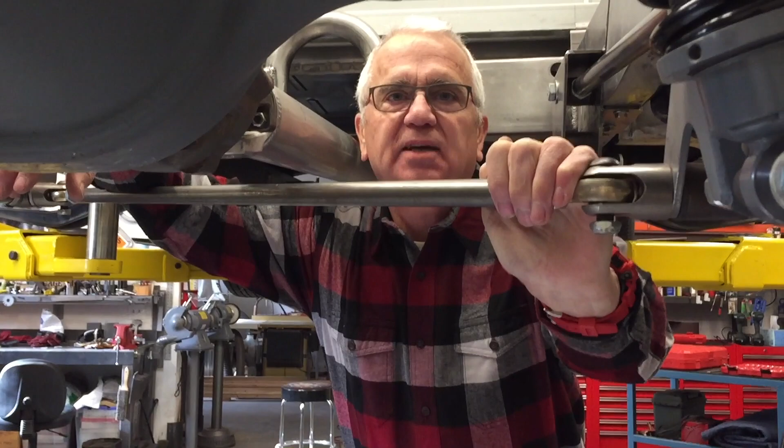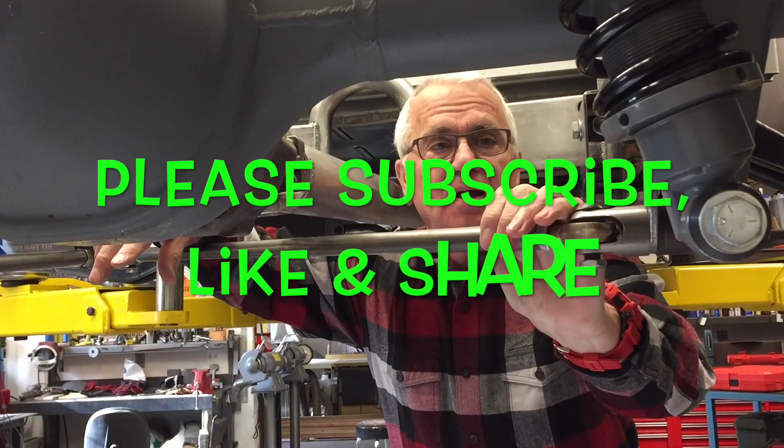Today I just wanted to do an update on what I'm doing on my 53 truck, kind of show you where I'm at and what I've been thinking about. And so today I'm going to talk to you a little bit about Panhard bars, what they are, and why I'm going to switch to it.

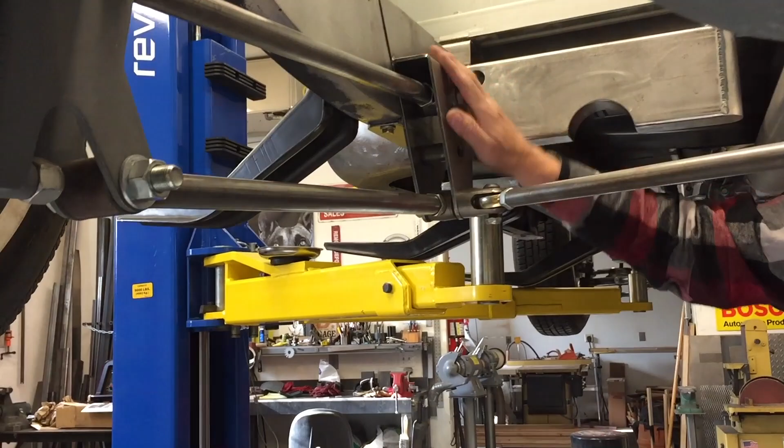So when I bought this suspension system for this truck, it came with this bar here, which is called a diagonal link. And it hooks to the frame here through this bracket, and then it goes at a diagonal all the way over to the axle housing. The purpose of this diagonal link is to keep the axle centered in the wheel wells, centered in the frame, okay? And it works for that.

It keeps it centered. But what I found out in doing some research is that this is really for drag racing only. It's not really designed for street use. It puts a lot of strain on these joints in hard cornering. And I'm not making a straight ahead drag racer. I'm making something for driving down a road, doing smoky burnouts, fast cornering, stuff like that. Have fun. So I decided to go with a Panhard bar.

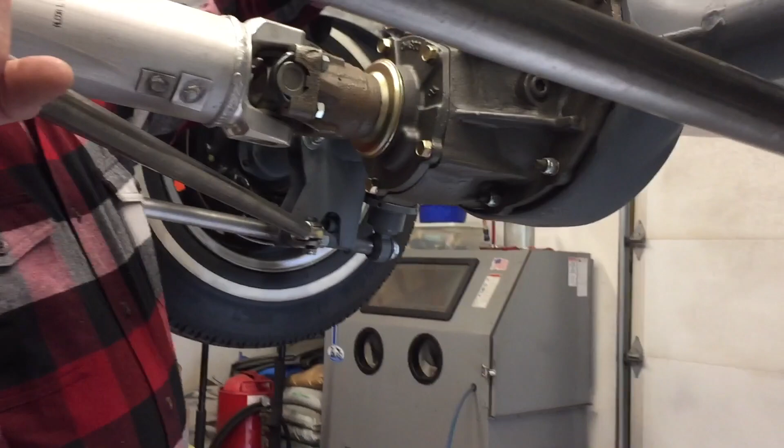And I'm leaving this in place right now so that I can fit the Panhard bar and make sure that it's centered in the frame, okay? So if you come around to this side so they can see what's going on. So I've already got one bracket mounted to the axle housing for the differential. And the Panhard bar is an adjustable bar that goes from the differential housing over to some tabs on the frame. Okay, and I'll show you over at the bench.

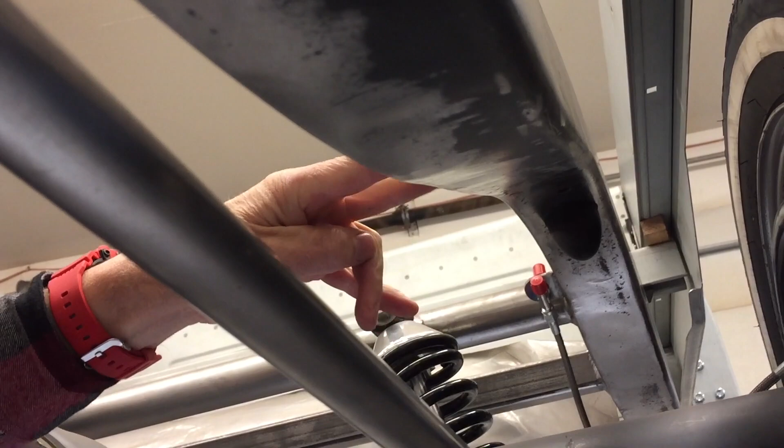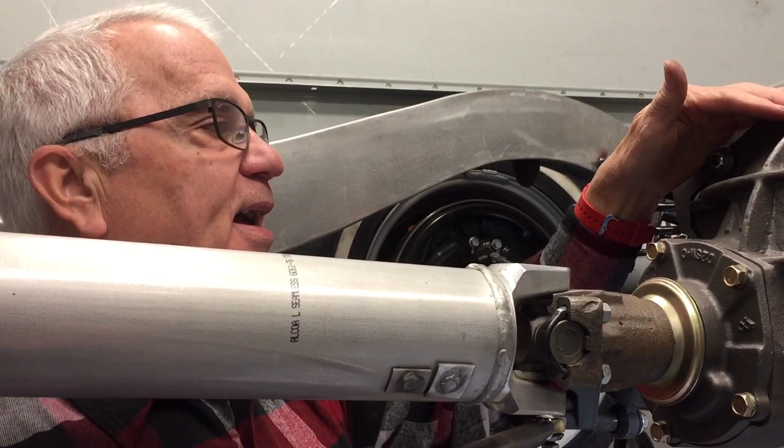And so it's adjustable so that you can center the axle housing in the frame rails. And it's much better suited for street driving, for cornering, things like that. And for what I'm doing, I think this is kind of a weak link. So I'm going to show you over at the bench what I'm talking about. And it's pretty cool. Let's go over to the bench.

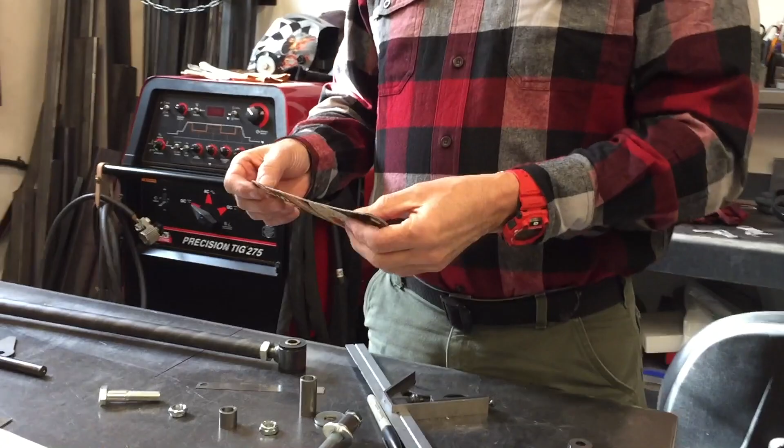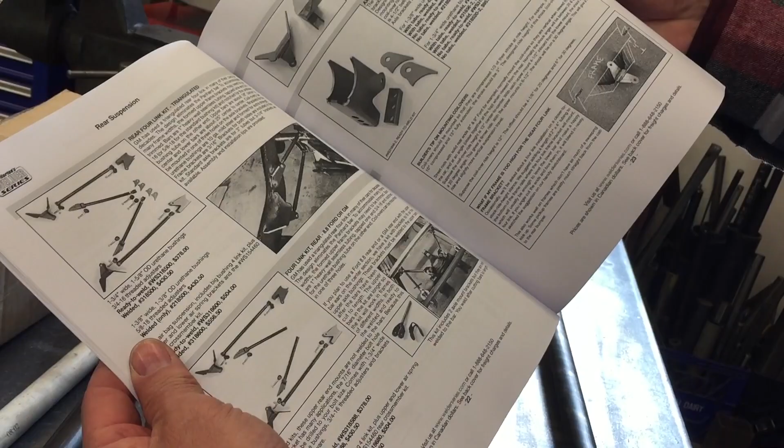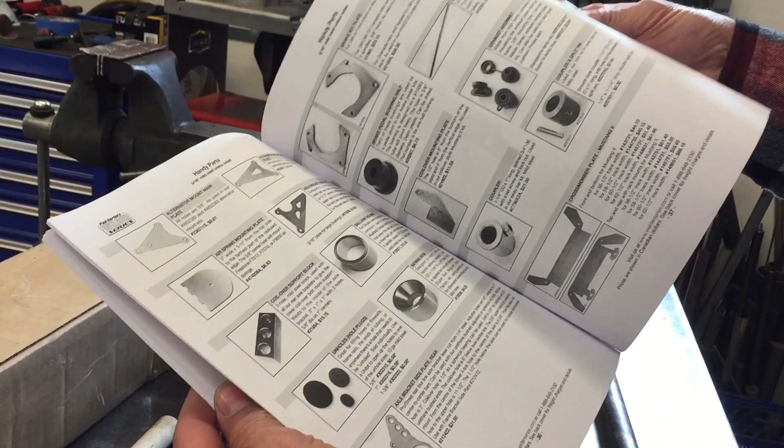Okay, so first of all, let me just tell you that I went with this company here. It's called Paul Horton's Welder Series. He's in Canada and has a nice catalog with all kinds of fabricated stuff that works. You got 4-link rear suspension, triangulated links, all kinds of stuff, sway bar kits, brackets, axle housing brackets. Really a good source of parts that can get you going on your project.

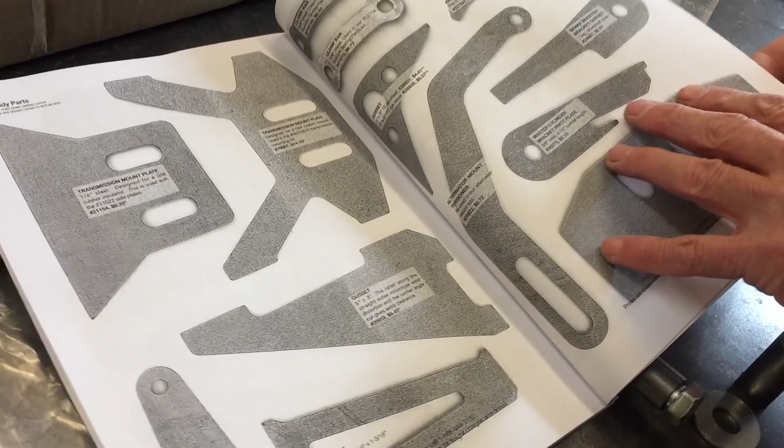But what's really kind of cool is on the back of his catalog, he has one-to-one pictures of all of his brackets, everything that he makes. And so what I did was, this is the Panhard bar bracket. So I just photocopied this and then cut it out and put it on a piece of cardboard. It's actually one of my oatmeal boxes.

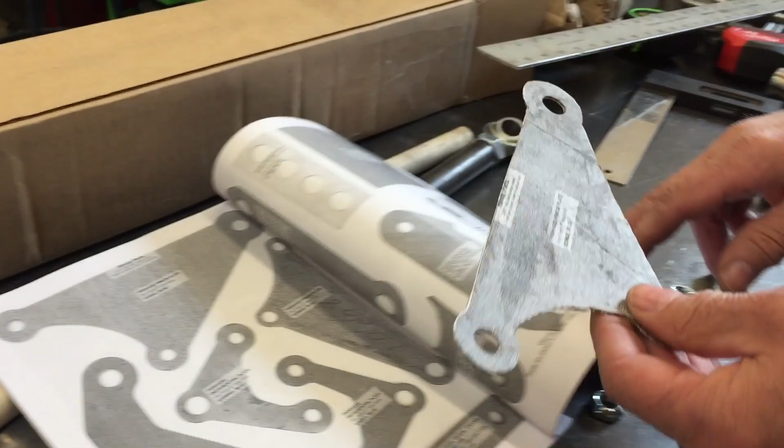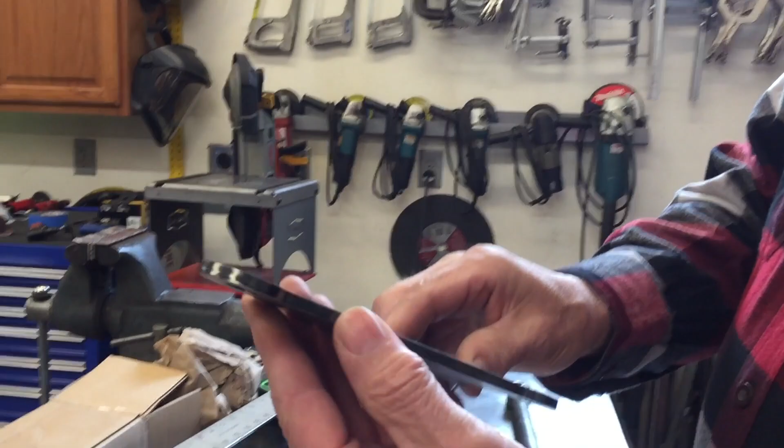And I used this to figure out if I was going to like how the thing's set up. And I kind of held it up there and played around with a piece of wood doweling just to see if I liked the way it was going to fit. And I really did. And on this design, it uses 2 mounting points. I showed you the one on the axle, and this other one comes with the kit too. And look at how nice, beautiful laser cuts. The holes are perfect. It's just a nicely fabricated piece.

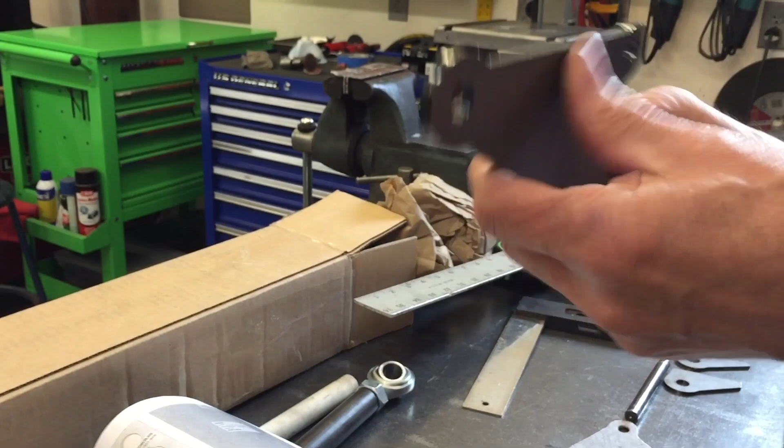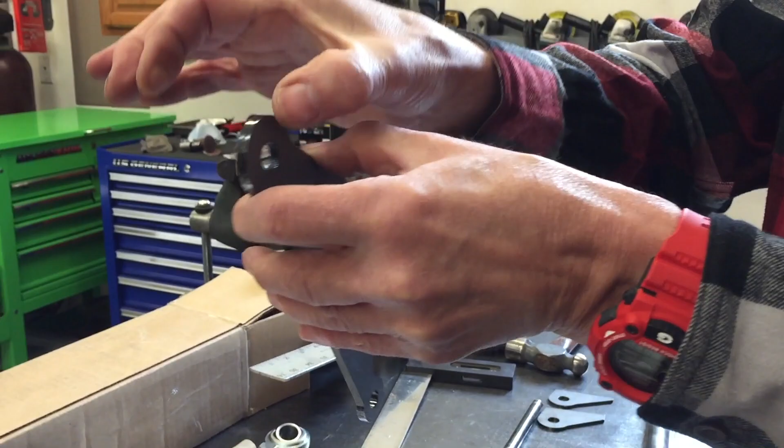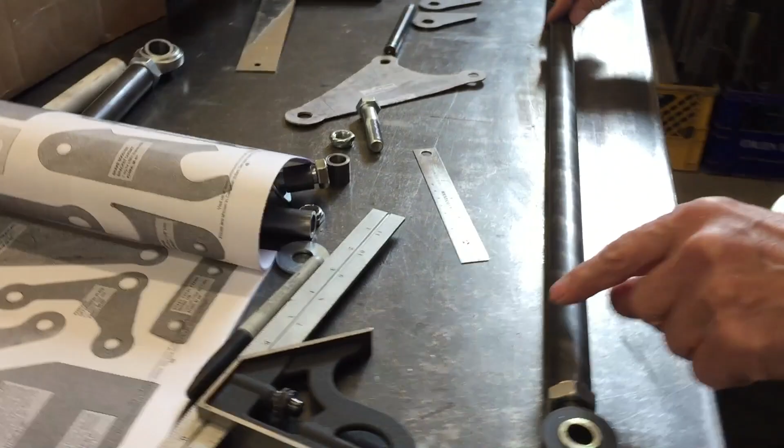Okay, this mounts to the pinion carrier plate on the differential. And so I have 2 points of contact for the Panhard bar. So here's the Panhard bar. This is what you get in the kit. It's 7/8 of an inch DOM tubing. This end is threaded, has a threaded insert, okay, and then a lock jam nut.

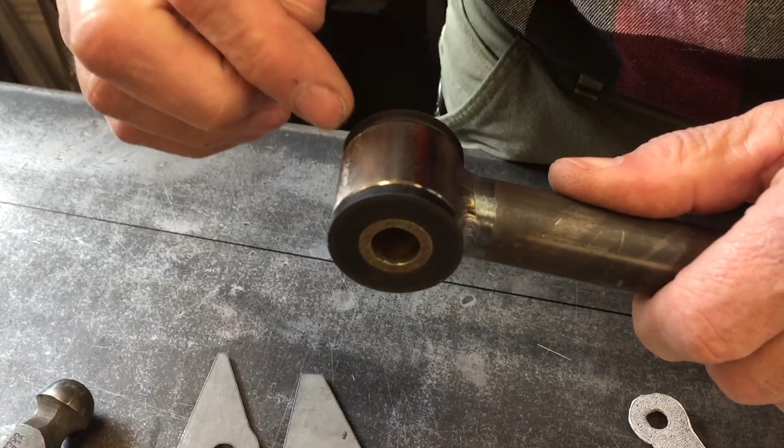And then the other end is nicely TIG welded onto the shaft. And there's a steel bushing in here, and these are polyurethane outside bushings, so they kind of cushion from road shock and stuff. So this end mounts to the differential. This end mounts to the frame. He gives you these tabs in the kit, and you'll notice that one of the tabs is longer than the other one. And the reason that it is that way is because most of the frames taper, right?

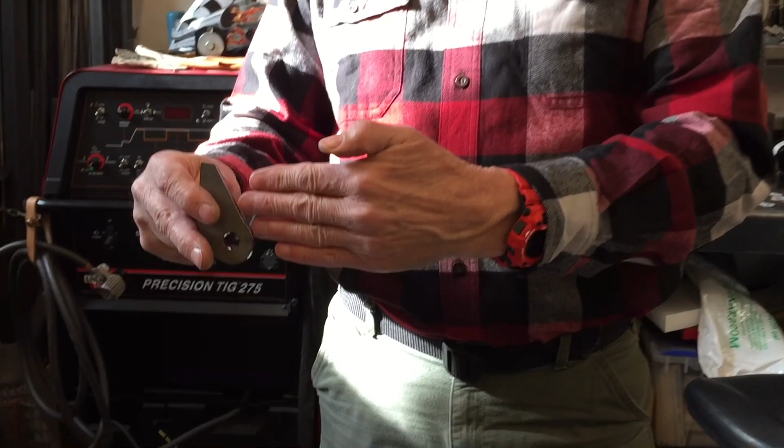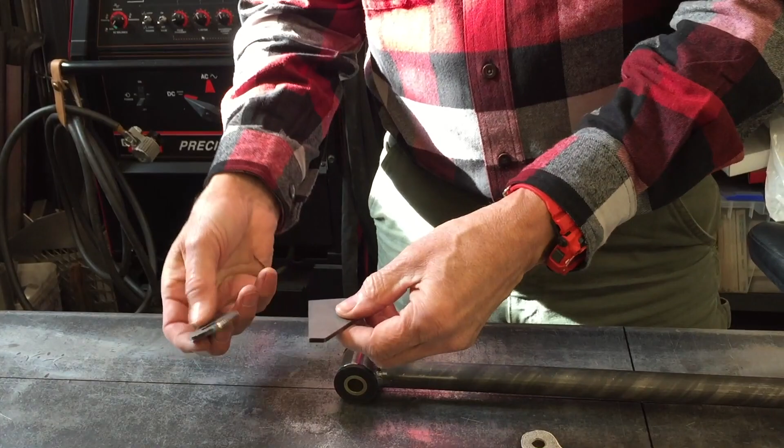And if you just stuck them on the same way, it would put this in a bind. It would be at an angle because the frame is tilting, so it wouldn't be flush with that. I hope I'm explaining that right. So you get angled, you get one shorter than the other. So the long one goes at the, let's see. Yeah, the long one goes this way, and the short one goes at the back.

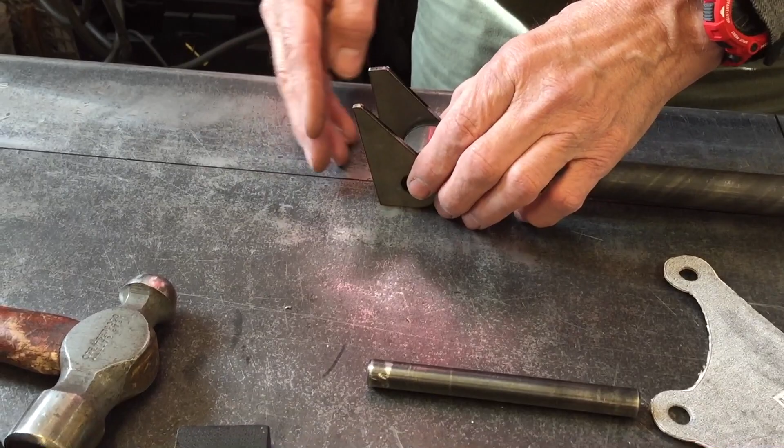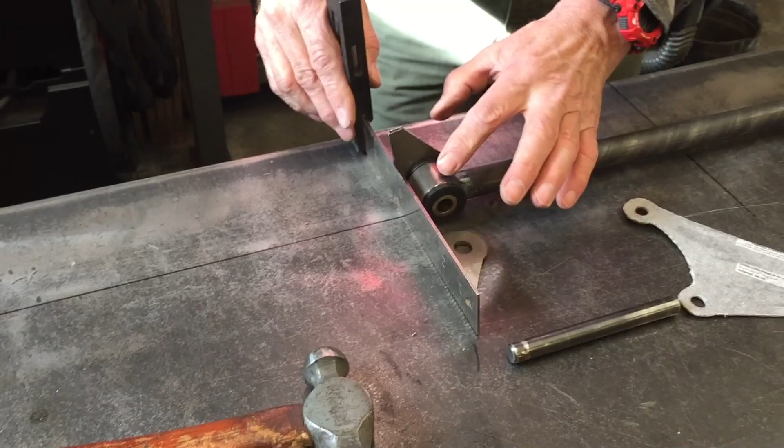And so what that does is, because the frame tilts, like if this was the frame, it allows this to be plumb with the differential. So that's pretty cool that he's already taken that into account. And of course you can file these or grind these to custom fit for your frame, how much angle you have and stuff. So that's pretty cool that he does.

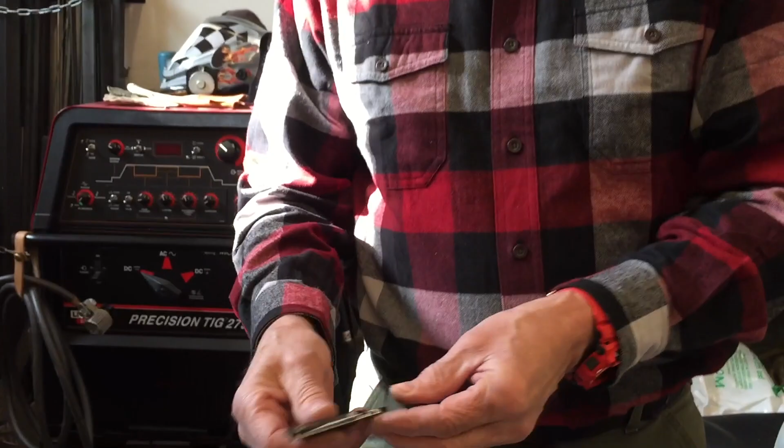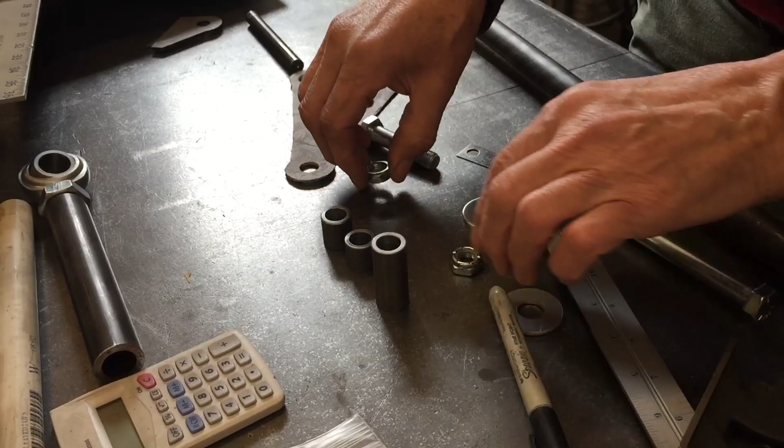So in the kit, you get these two tabs. You get the Panhard bar with the bushings, everything you need. You get the bolt for this end. You get these different sleeves because different applications call for different sleeves. You get two washers, two nylock nuts, and then the bolt for the tab end. So it's a pretty complete set. It comes with everything you need.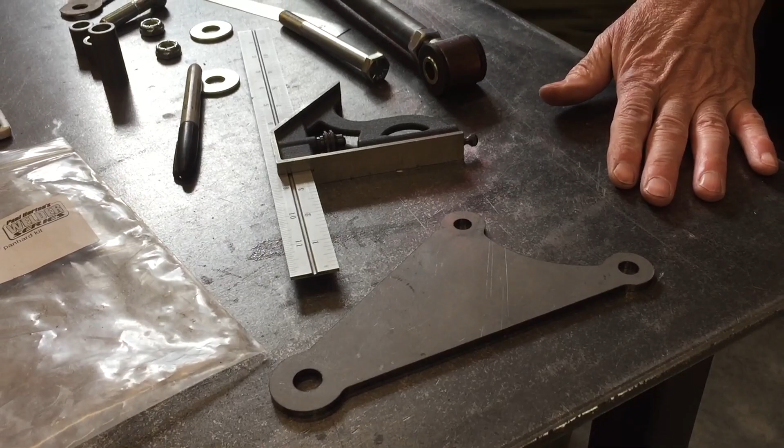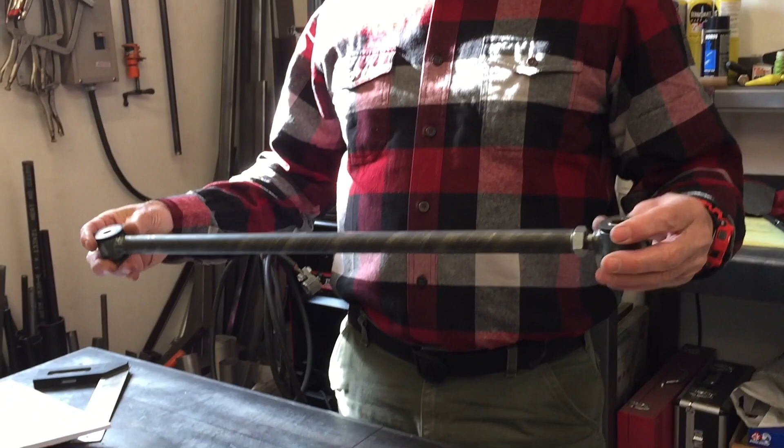And what's really cool is I called him up and I told him what I was working on. I gave him the measurements that I had, how wide my frame was, okay? And then another measurement that they want is from the center of the top of the pinion to the frame. So I gave him all those measurements, and he has a calculator. He's been making these for a long time, and so he was able to come up with the exact length that I needed for my Panhard bar. So that's pretty cool that you can get it essentially custom done.

I think shipped to me was $112. So it's a good value. As you can see from these parts, the quality is top notch. So let's go underneath the frame and, before I get started, let me show you something.

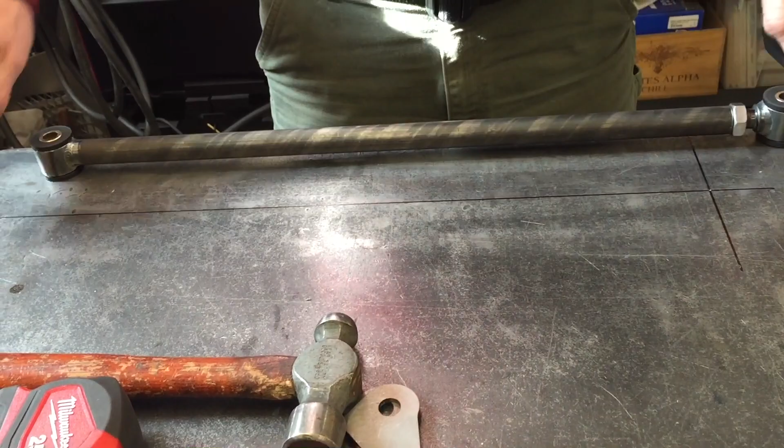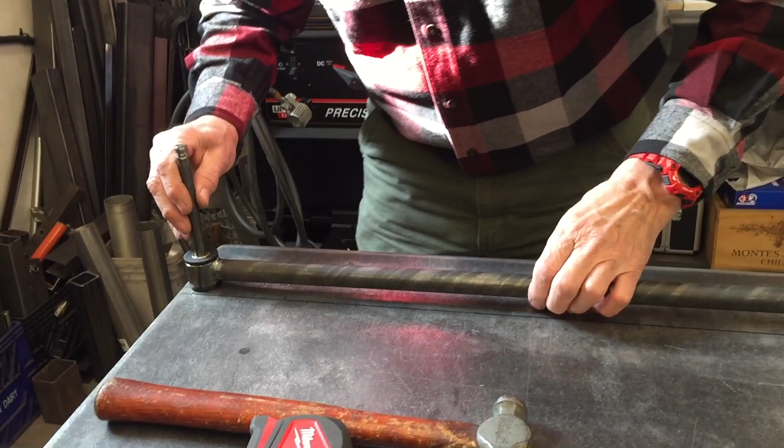Okay, so I set up a little test here to explain something. So let's pretend like, so I drew a line on the bench and I center punched it so that I would be in the center of these two holes. Okay, and then let's see, so I got this little alignment punch. So I'll go in here and I'll find that little mark. Okay. And that one. So that's centered, right?

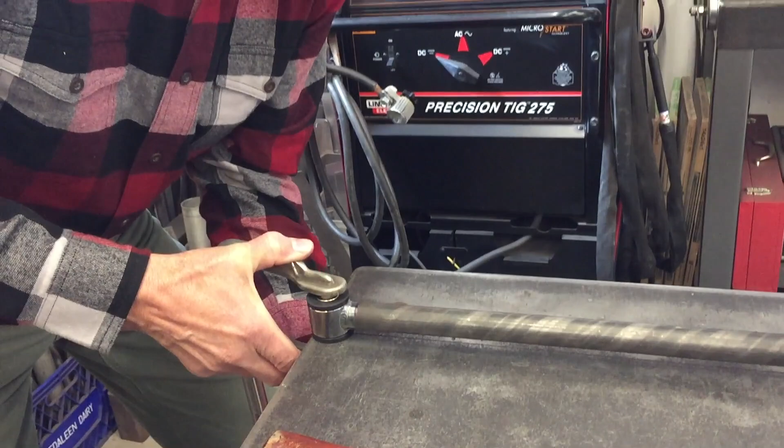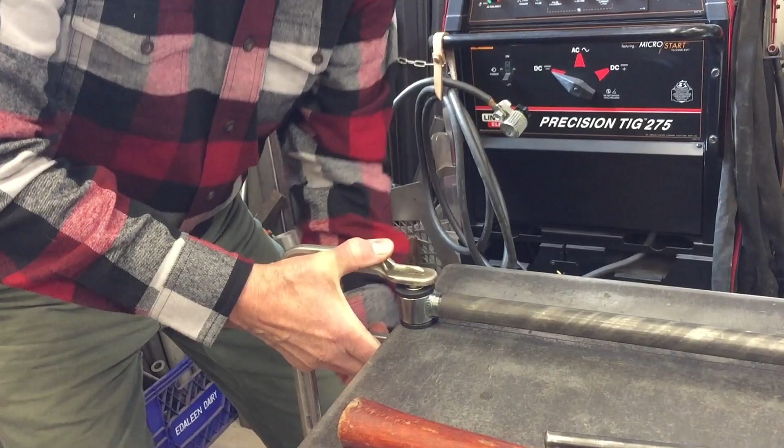So now what I'm going to do, I'm going to drop a little spacer in there. And then I'm going to clamp that to the table. So this would be like it would be in your vehicle. So this is going to become the hinge point of the, darn it. There we go. Okay, so now it can hinge. Okay, so think of this as being attached to the frame and this being on your axle housing. Okay, let's find the center. Right there.

So as you move your suspension up and down, because this is a fixed length, your axle housing is going to move from side to side. Okay, it's going to. So when you install this Panhard bar, you want to make sure that it is at the same level as the axle housing itself. They're on the same plane at ride height. So kind of at a neutral position. So as the axle moves, you know, when you hit a bump and the axle comes up, and then when the axle comes back down, at ride height, it's always in the neutral position, okay?

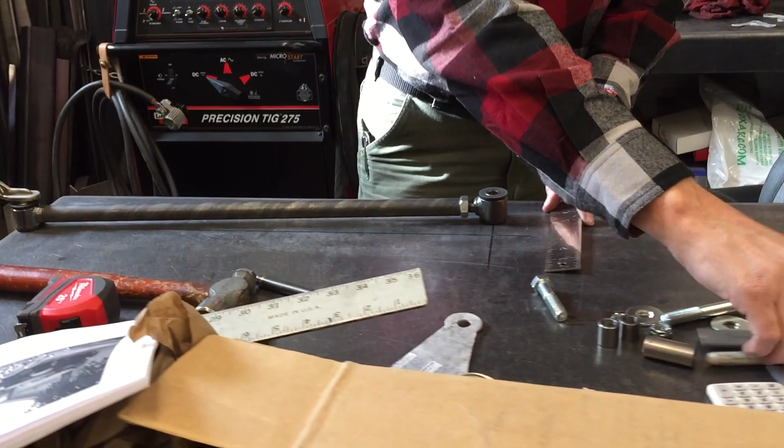So as you move your suspension, and let's say I have about 3 inches of travel on my suspension. So 3 inches of travel there, 3 inches of travel there. And what I'm going to show you is how much it moves. So let's say I hit a bump and it moves up 3 inches.

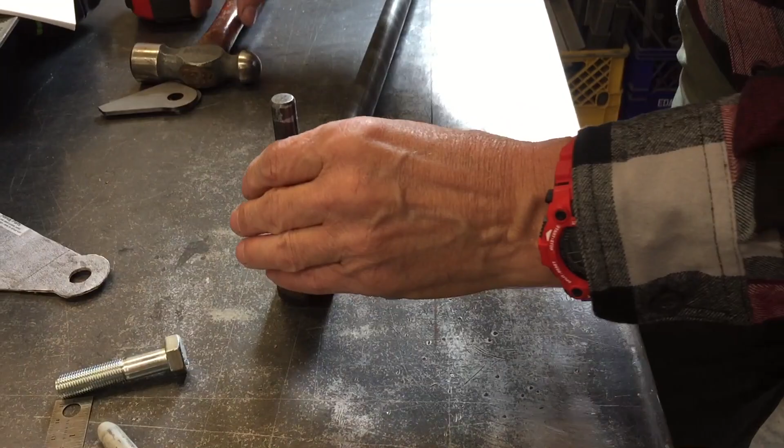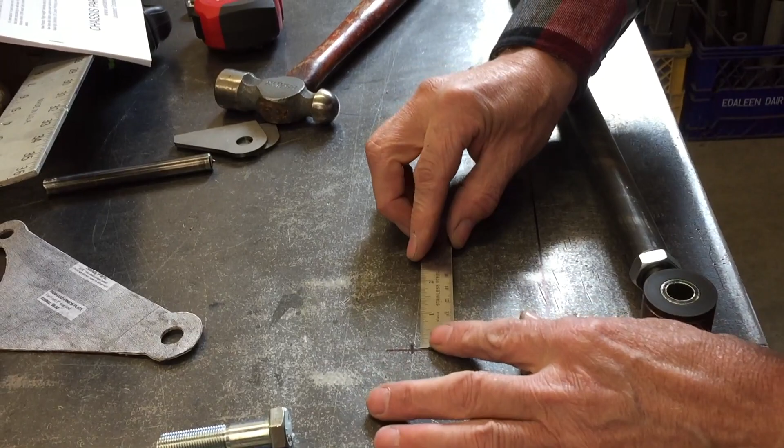That would be a pretty good sized bump. So take my ruler, put it on here, and it moves about, gosh, it's so small, 1/8 of an inch, okay? So that means that at full suspension, both ways, it's going to take the tires and move them 1/8 of an inch, one side or the other. Let's see, if you hit a bump, it's going to pull the tire. It's going to move it on the driver's side 1/8 of an inch out, and on the passenger side 1/8 of an inch in, if that makes sense.

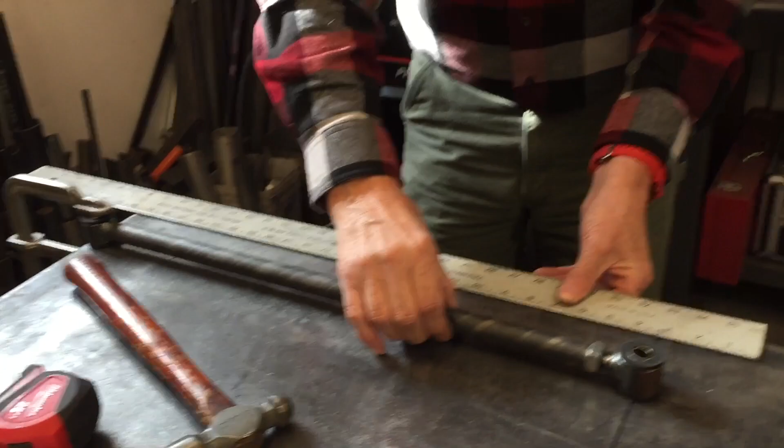But I wanted to show you this because this is the reason why you want this Panhard bar to be at the same plane as the axle housing. So if this was the axle housing, you'd want it at the same plane, level with the axle. So neutral. That way the movement is identical, compressed or extended, depending on what your suspension's doing. If you mounted it in the vehicle and it was like this, then when you hit a bump and moved your 3 inches, it would be uneven.

It's hard to explain. You know, I'm not an engineer, guys. I just wanted to know this for my own, like, how much is it going to move? And I looked on the internet and I couldn't really find anything, so I just came up with this little example for me, and I thought I'd share it with you. So the bottom line is, according to people that are really smart, keep this level with the axle housing, and as you can see from my little non-scientific method, it's about 1/8 of an inch of movement, so that's not much at all.

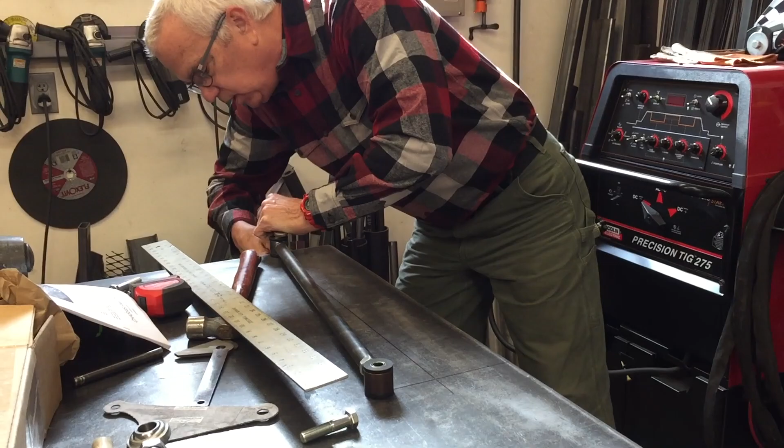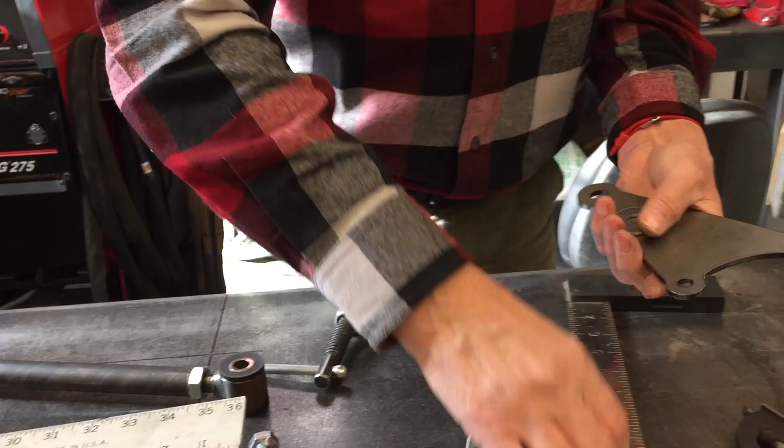And so hey, let's go into the truck. Let me show you how this fits on there. So it's pretty cool. Okay, come on there, get that off. I'm gonna put these on so you guys can see how that works. That to there. These are good. This part gets welded to the frame, obviously. And okay, so I need this. All the assorted hardware, spacers, and the Panhard bar. So let's go underneath. I'll show you how it's supposed to work.

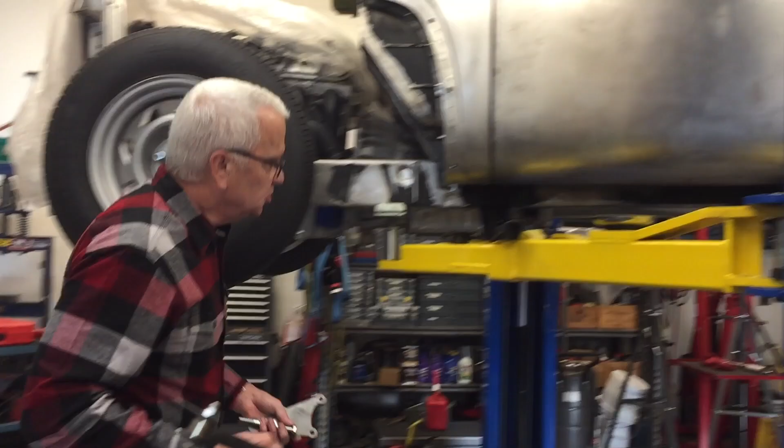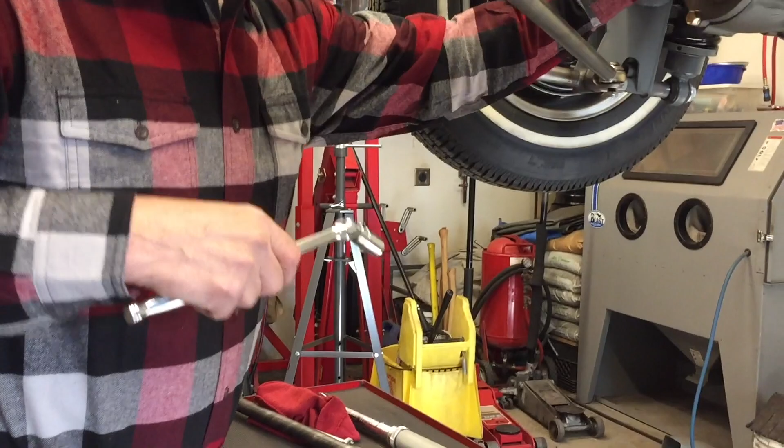So the first thing you gotta do, I've already got this one mounted on there, and these axle housings use nylock nuts to hold them on, and there's not a whole lot of thread left. So what I did was, this is 3/16 plate steel, and so if I reused the nylock nuts, there wouldn't be any nylon to lock it onto the stud. So I use steel lock nuts. They're a lot thinner, and it locks it onto the thread. So just a little tip for you guys.

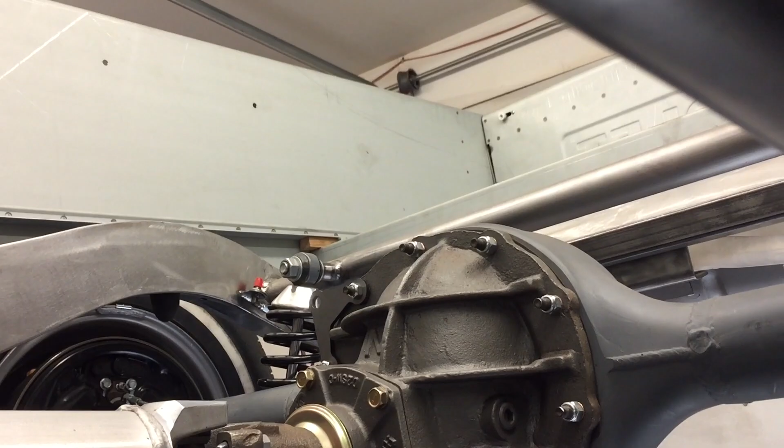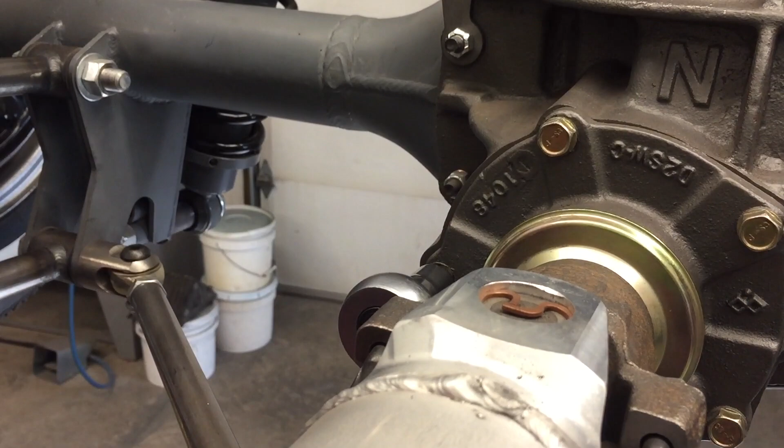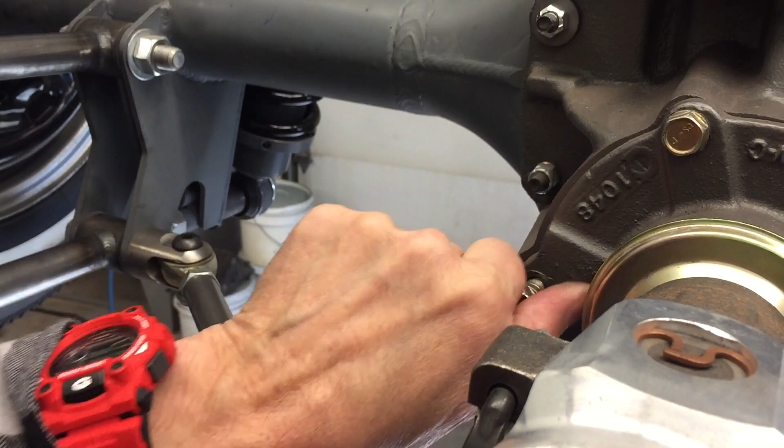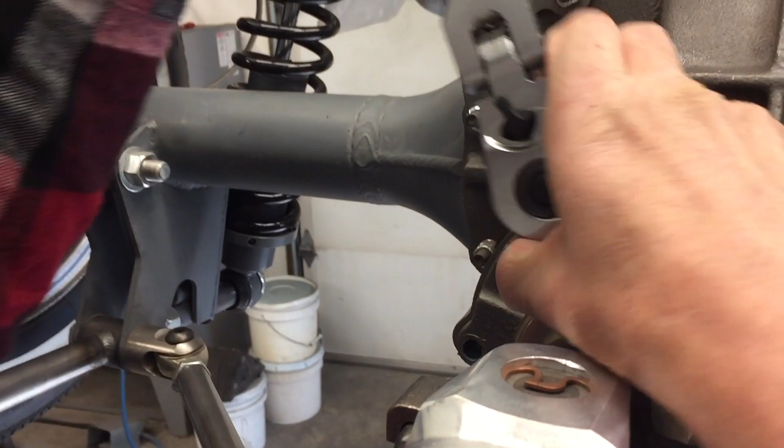So now we gotta loosen these guys. Boy, it's tight. I don't know why they put that on so tight. I'm sure they got thread locker on there. We will soon find out if there's thread locker on there. Yep. Blue Loctite. Well, it wasn't red. That's good. Yep. Blue Loctite. So I'm going to put this on. I think I'll probably Blue Loctite it again. That's probably not a bad idea, I guess. But what I want to do is show you guys how this works.

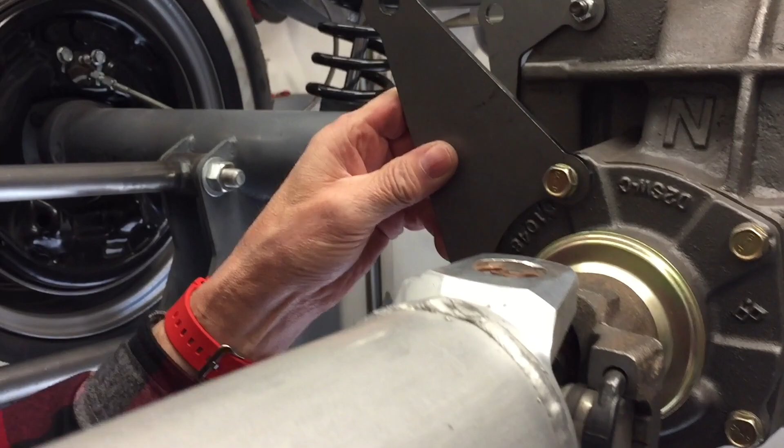And let me get a ratchet. Boy, they really put the blue Loctite on that thing. Okay, I don't need to put the other one in to show you how this works. Okay, so we get the Panhard bar up in here. And I know according to the, let's see, which one? So I think it's the longer one. Maybe two of those.

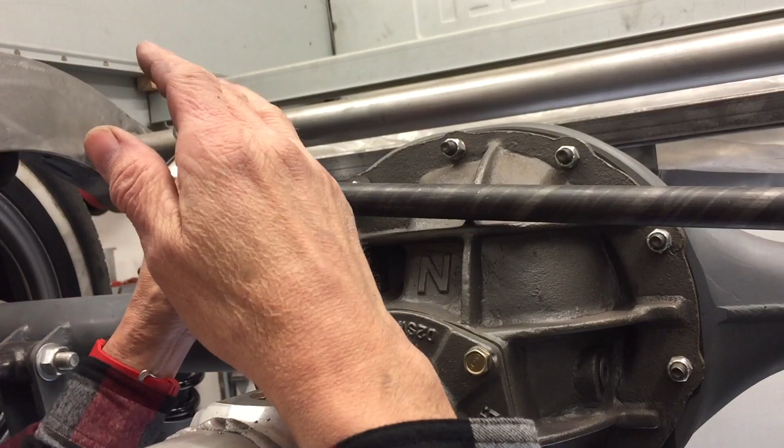Okay, so I guess I'll set this here while you get one in there, and then your flat washer, and then this goes in there like that, and then another flat washer. Huh, I left it over at the table. So one flat washer goes on each side of the polyurethane bushing. And then they said that I might have to use this shorter one. I think I am going to have to use the shorter one. So take the shorter one. In, shorter bushing, that.

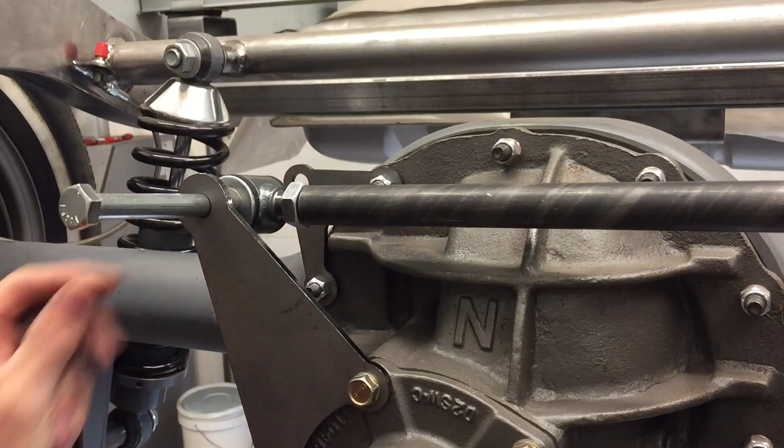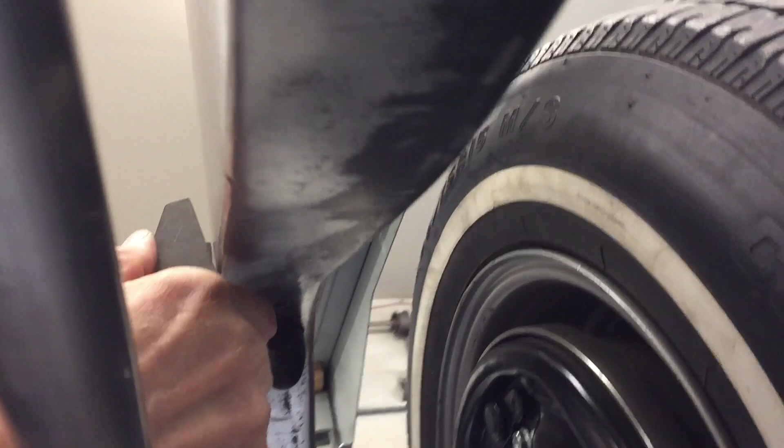It is a tight fit. Okay, well, I'd have to fuss with it a little bit, but so you got this other spacer here, and the purpose of these spacers is so that you get adequate clearance so you don't hit the pumpkin, the third member, okay? This is where I was telling you that you might have to do some grinding to get it just perfect. Like this one's gonna have to be shortened up a little bit, but you get the idea.

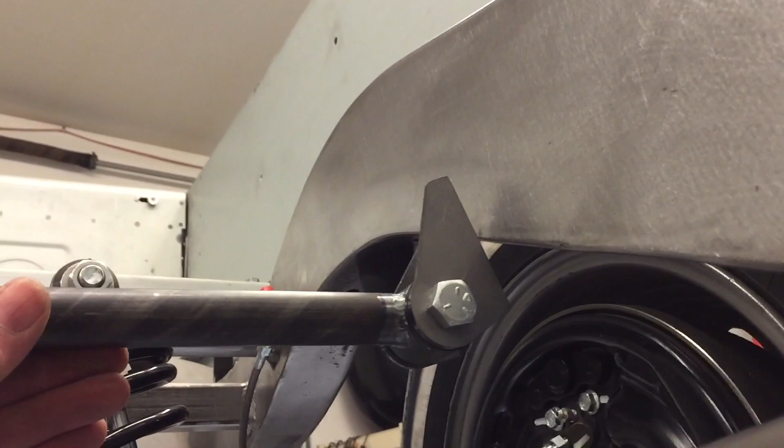You want this Panhard bar to be level with the axle housing, okay? Now see, right now, I'm not at ride height. This is gonna come down almost 2 inches. So I'm gonna load the back of the truck up. I'm gonna take some of my sand for my sandblaster and put about 250, 300 pounds in the back of the truck, because a full tank of gas is about 125 pounds. And then the bedwood and the fenders and all the other stuff, I'm thinking another 150, so maybe around 300 pounds.

And what'll happen is this frame rail here will move down so that this will end up being probably somewhere like that when it's set up right. And you see the angle it's at right now? Well, that's the angle that it would be if the suspension dropped in a hole, because the differential would move down. But then when we go to ride height, the Panhard bar would be level with the axle housing. Hope that makes sense.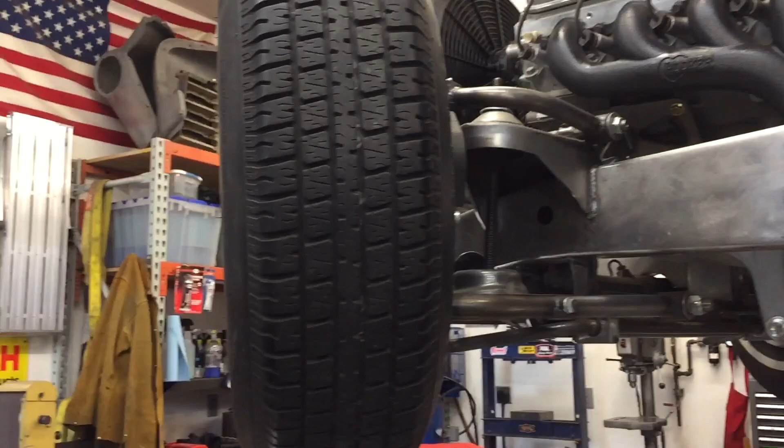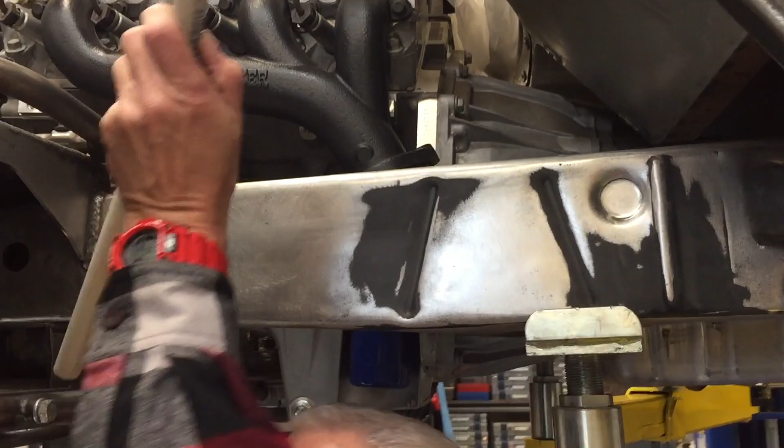So let me show you the other thing that I've been working on the truck. It's up front, let's walk up there. Okay, the other thing is my steering. So I've been thinking about this for a while, and so I made this little, as you can probably tell, I'm big on jigs. This is just a piece of fuel line inside a piece of white PVC pipe. And so what I'm doing is, down under here is the rack and pinion. I don't know if you can get under and show them, maybe from this side.

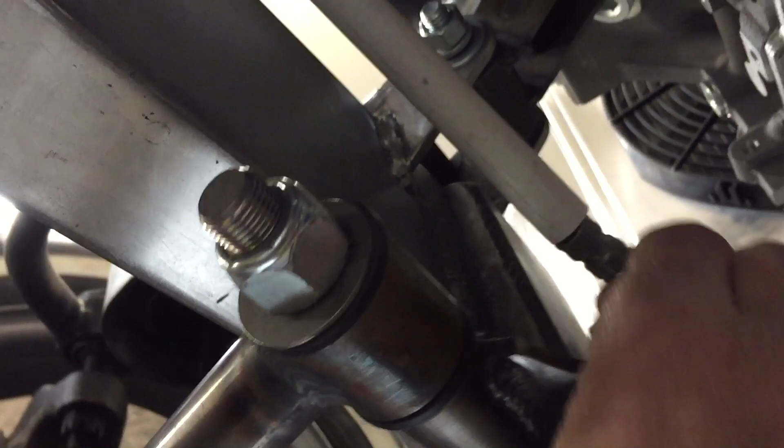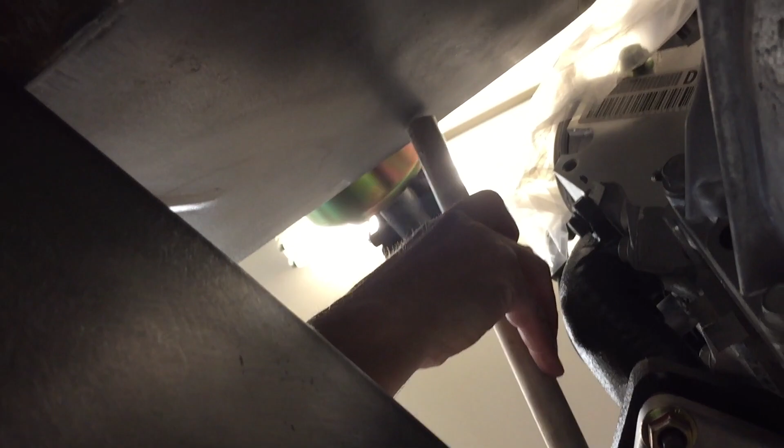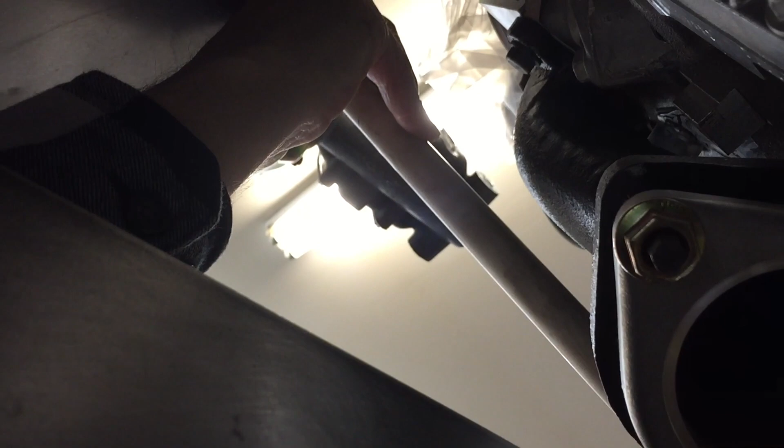Okay, so there'll be a U-joint here, so this can move a little bit. And then there's going to be another U-joint right here. And so that rubber kind of holds it together for me so I can play around with it and measure it. I'm thinking it's probably going to turn out something like that. I'm going to have a U-joint up here, a U-joint here, and then one right at the rack and pinion. And then because I'm going to have 3 U-joints, I'm going to have to support the middle here, and let me show you what that looks like. It's over at the bench.

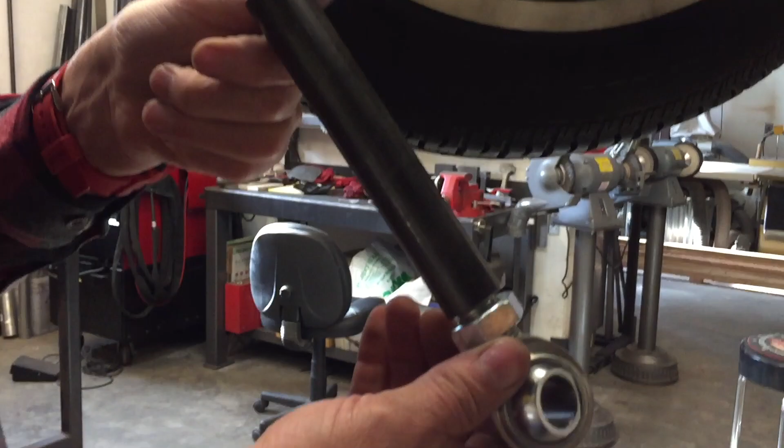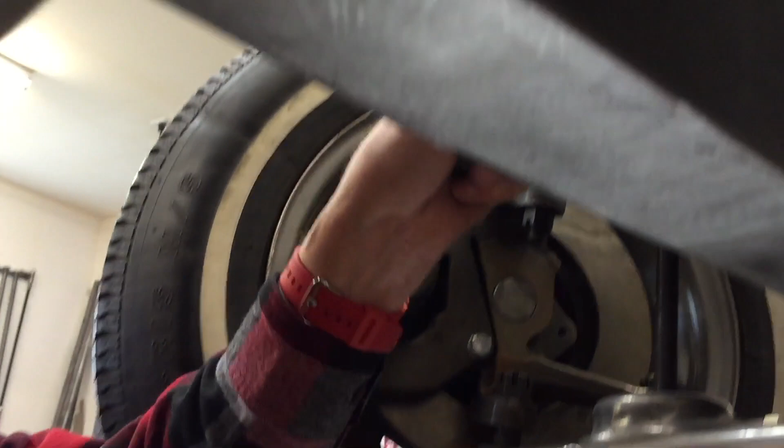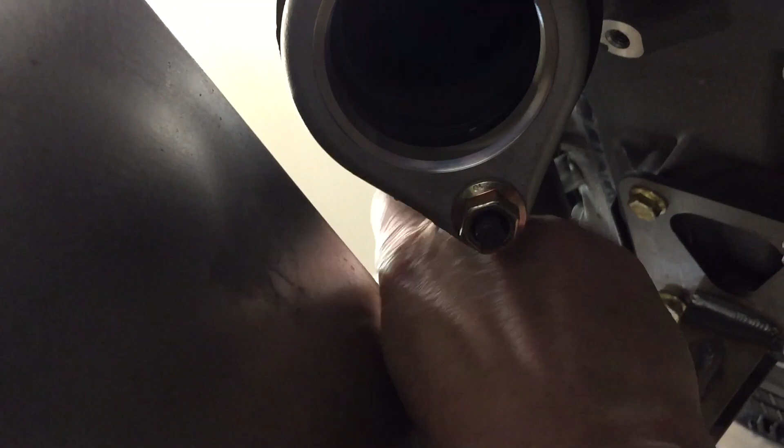This is what it looks like, guys. So this comes in a 6-inch length, so you just cut it to fit. And this is a 3/4 inch hole, which is the size of the steering shafts that you get. And so I will just cut this to fit and weld it to the frame. And this allows you multiple angles of adjustment. And so the steering shaft will go through here. There'll be a U-joint right in here somewhere. And that'll support that, keep it from moving side to side. So that's what I'm working on.

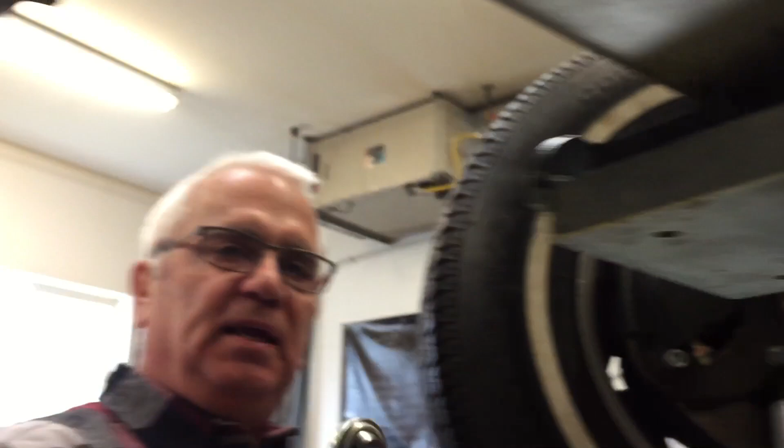So I'm kind of getting all the parts I need and figuring out, I got to order the U-joints, I got to order the steering column, and the steering shafts. And that steering column stuff's pretty expensive. Those U-joints are $50 a piece. And then the steering column is like $350, something like that. So I'm saving my pennies. That's coming up. I'm going to work on that. And I'm going to work on the Panhard bar, get that dialed in for you. I just wanted to show you kind of where I'm at. I'm constantly working on this thing in between other projects that come up here on the property.